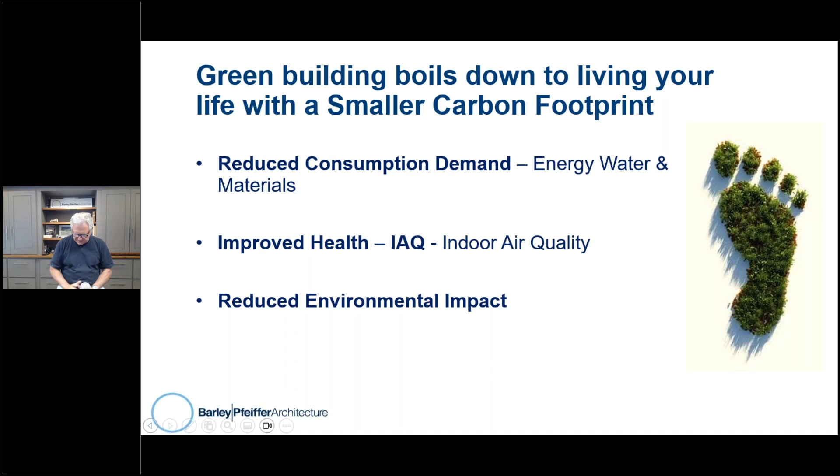So to me, green building really boils down to a smaller carbon footprint. How do we encourage folks to live with a smaller carbon footprint? We reduce the consumption of things: water, energy, materials. We look to improve your indoor air quality so you have better health. And we reduce environmental impact by choosing smartly where we're going to build or remodel. So those three things form the foundation of the green building movement.

As it moved forward, I realized we have to keep it simple, because if we get into complicated things, you've got to understand complicated things, gizmos, etc., they break. Solar systems, for example, will not last forever. My inverter on my home system went out 2 years after the warranty was up. So my payback went from being 13 years to more like 21 years. Keep in mind that it would have been better just to save energy in the first place by design than to try to create energy.

So we want to first and foremost rely on thoughtful climate-sensitive programming. What decisions can we help our clients make that will make it so they can live better while living with a smaller carbon footprint? They're not really complicated, folks. They're some very basic things. And then I also want to advocate the idea of building the architect and builder team early on. When we build the team early on, there's a great synthesis that can occur that will make building effective and less expensive.

I think the green building movement is failing a bit in its mission, and I know that's a strong statement, but I think a lot of it goes to the fact that while LEED and energy efficiency programs like Passive House USA, LEED, and others are wonderful, and they've really brought this whole concept of living with a smaller carbon footprint to the public's consciousness, you almost get too complicated in your approach.

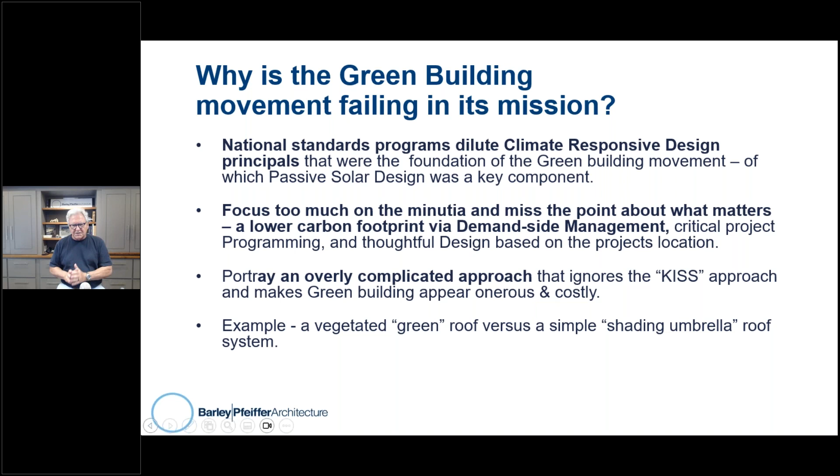Because we have to be careful. A green roof in Austin, Texas would be a very tough thing to keep alive during these past 4 months without putting a lot of water on the roof, and water is becoming more and more dear around the country. So I'm not saying vegetated roofs are bad. I'm saying just make sure the strategies you choose make sense for your location and your climate.

Another point is that most of you listening to us today are in a very, very important position when it comes to society. Our clients put trust in us to guide them through the most expensive endeavor of their lives. So it's incumbent upon you to understand things objectively and give them objective guidance. We sometimes don't realize how important that is, but think about it. The most expensive endeavor of most people's lives is building their home. The advice you give them affects that.

And it starts off with this project programming, and then we get into the design decisions, then the building science decisions. But while building science is important, especially when it comes to the long-term costs of owning and maintaining a home, it's the decisions we're going to make early in the game that are going to affect things even more.

Here's a small but obvious example. Here's 2 homes in Austin, Texas. One is painted white, one is painted black. Look at the difference in the wall temperatures of those 2 homes at the very same time of the day. 101 degrees versus 131 degrees. So that decision to go with a dark color doubled the amount of insulation needed in those walls to keep the living quarters on the other side of those walls as comfortable.

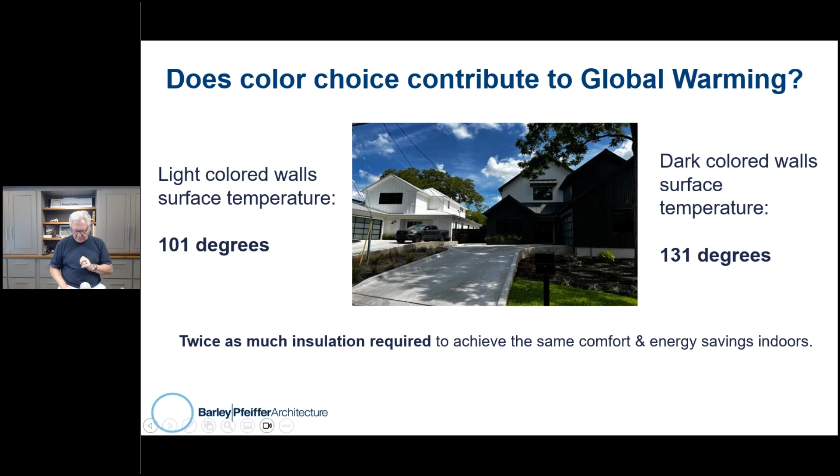So it doesn't only affect those things that I just mentioned, but it also affects this thing called the suburban or the urban heat island effect. If you have a neighborhood of dark houses and dark roofs, it's going to be at least 3 and as much as 5 degrees warmer than a neighborhood in an area like ours with light colored roofs and light colored exteriors.

When I went to graduate school, I was enamored with this professor who convinced me to come here. I was looking at some wonderful schools like MIT and Berkeley, but the University of Texas had a physicist on the School of Architecture staff who was the first that I knew of to develop an energy analysis program to help builders and architects understand how their buildings are really using energy.

And he taught us to use computer-based analysis and metrics so that we could do this analysis, but more importantly, so that we could develop an intuitive understanding of how to design for the environment. He said, think about what enhances your personal comfort, then design the building with that in mind.

Here's a good example. In Austin, as I said earlier in the talk, we air condition 50 to 75% of the days of the year. So is insulation that's going to keep you warm going to be of great benefit? Probably not.

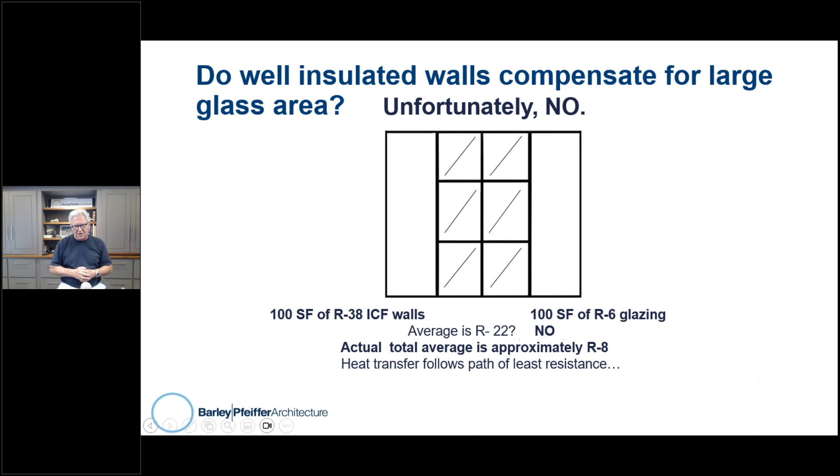So there is an example of, while it may be popular to do floor-to-ceiling glass and a lot of it, you have to be careful. Here's another example. That bottom third or a quarter of the glass that's down near the floor that you're not looking out of is contributing to 75% of the solar radiation gain in the building.

We've done energy analysis of flat roofed houses with floor-to-ceiling glass. Sadly, there is no way you can make them perform any better than maybe a C+ compared to a house with broad overhangs and a gabled roof where you had an attic. So these are neat design decisions, but be aware they're costing us in society money and the carbon footprint.

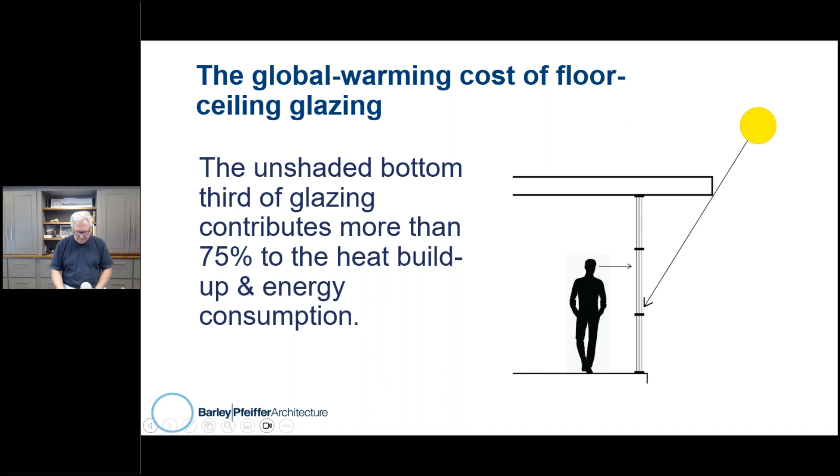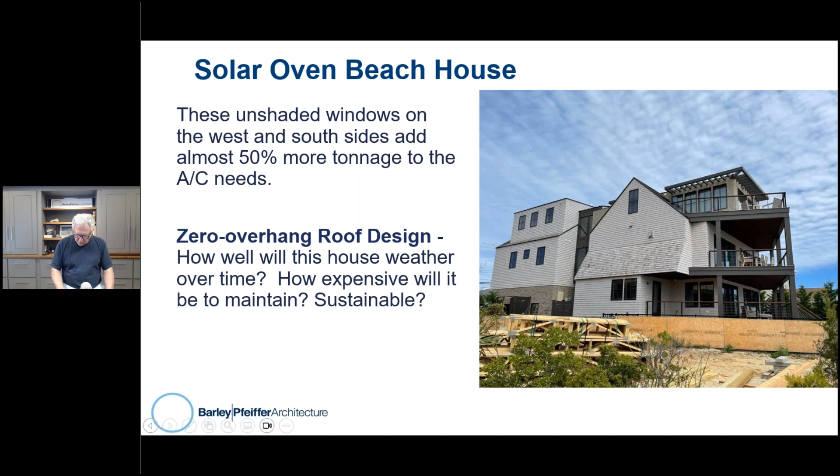So, as my mother used to say, if everyone else was jumping off the Empire State Building, would that mean it would be okay for you to do it? And I'm going to translate that to say, just because a lot of our colleagues are doing homes that don't respond to the elements doesn't mean you should be doing it. You can do good looking stuff that responds to the elements and to the climate.

The roof is another example of that. A living roof is wonderful for reducing the amount of radiation that penetrates the roof and heats up the home.

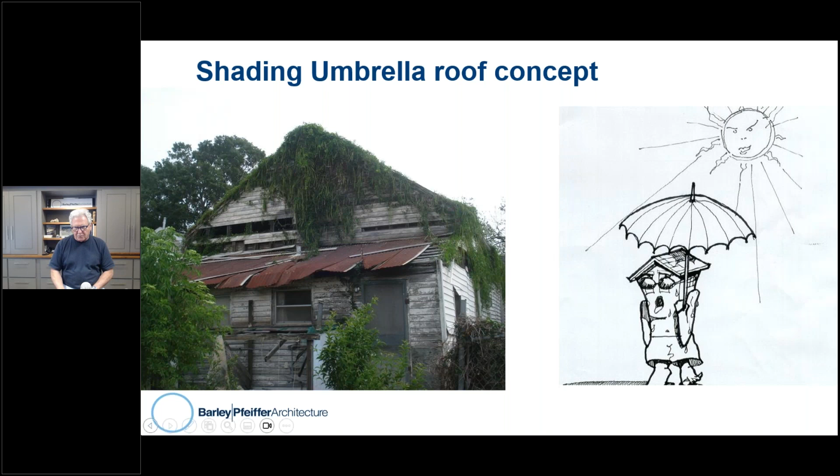But maybe we can do it more efficiently, and this is where we develop the idea of a shading umbrella roof. This is not an example of what you want to do. Here you've got a dark colored roof that's applied directly to the roof deck. So that roofing material, this metal roofing material, gets very hot and very efficiently transmits its heat to the roof decking and the rafters and the home below.

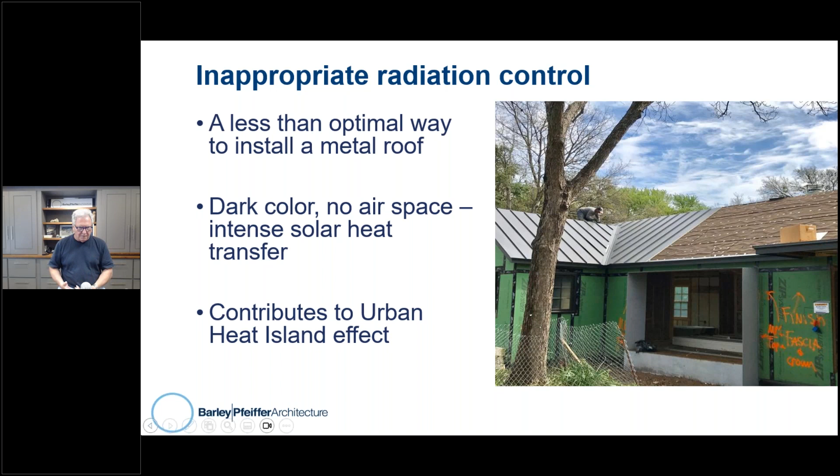So let me pull some of these things together for a project we submitted recently for some design awards. We call it Skyview Independent because it's a beautiful home that was designed for a family to pass on to their kids and their grandkids as a family gathering place. It's a relatively good size home, but its carbon footprint is wonderfully small. All of its electricity is generated on site by the solar system, but we were able to do that with a modest solar system because we shaded the windows and had this shading umbrella roof and did the design to respond so well to the climate. Also, all of its water needs are handled with the rainwater collection system.

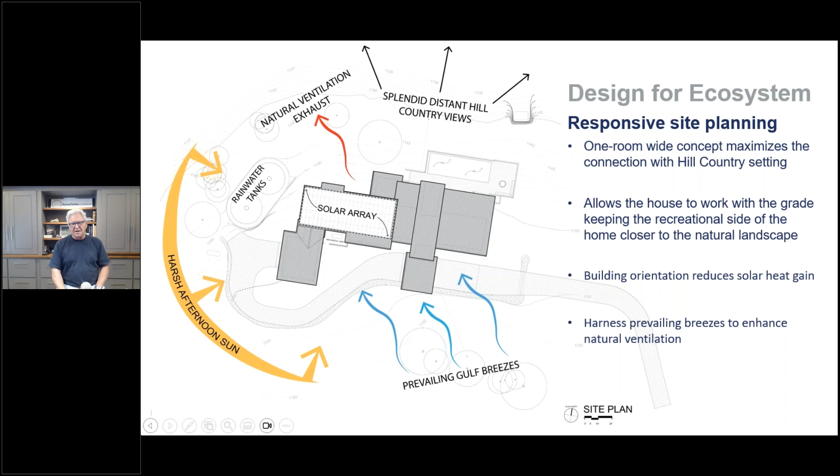So first and foremost, we want to make sure the building's oriented not only to the wonderful views, but to take advantage of the prevailing breezes and to shun itself from the hot afternoon sun. You'll notice on the left-hand side, that's a garage building that's taking most of the solar heat and some utility rooms on the left. We don't have the main living areas facing into the afternoon sun. The house is only about one room deep, so it could really take advantage of natural daylighting, shaded daylighting, reflected daylighting, no direct solar heat gain anywhere in this house.

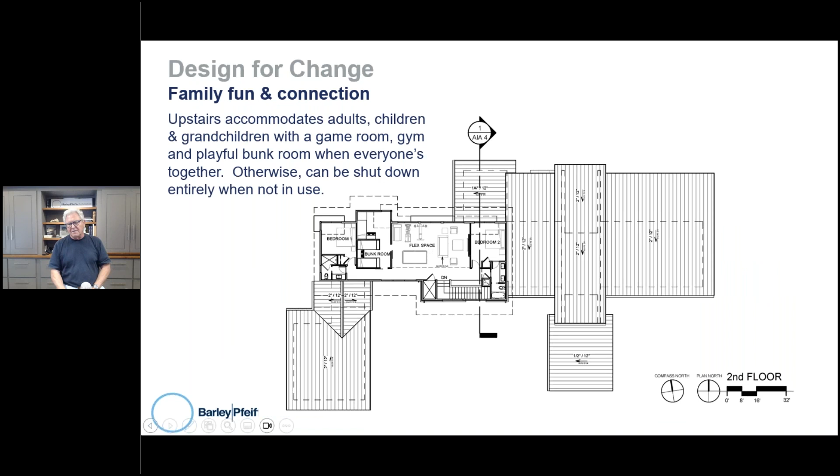On the second floor, which is where the grandkids and the kids would be, it's a whole separate air conditioning zone that can be just turned off in the summertime if the kids aren't there, or turned off in the wintertime when they're not there. You don't have to turn up the thermostat, just turn it off. The house won't melt and the house won't freeze. But the point is, we really separated the visitors areas from the main living area of mom and dad, so that we weren't air conditioning and heating a part of the house only for, what, 5% visits a year.

When we went out to the site, we experienced where the breezes were coming from. We did some studies ahead of time. A simple way of finding out where your prevailing breezes are coming from is look at the nearest airstrip. Whichever way the runway is facing tells you where the prevailing winds and prevailing breezes are coming from. So take advantage of that when you're designing. Look at the vegetation, get to know the soil, because the vegetation and the soil will be important for you to take into consideration when coming up with a design. But you have to go to the site, you have to learn it. The site will tell you all sorts of things.

So this design is luxurious, it promotes healthier living, it's resilient in the aftermath of natural disasters for one big reason in our area. You can live in this house without air conditioning. It's designed to be comfortable without air conditioning. Imagine how many homes you cannot say that for nowadays. But because the windows are shaded, it's not collecting a lot of heat. Same with the roof. And yet the windows are designed to enhance natural ventilation.

The house will get up to about 82 degrees on a 102 degree day without air conditioning. That's survivable. That's something you could live in after a hurricane shuts down the local power plants for a few weeks. So resilience takes many different approaches. A resilience approach here is to keep the house cool and comfortable after a hurricane.

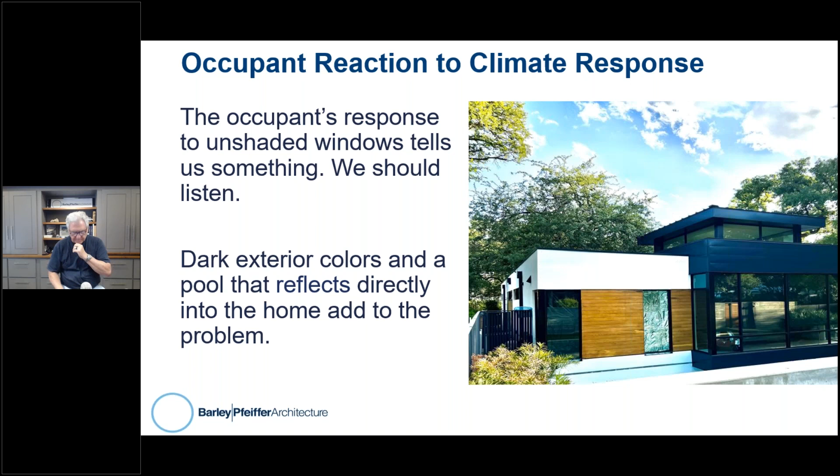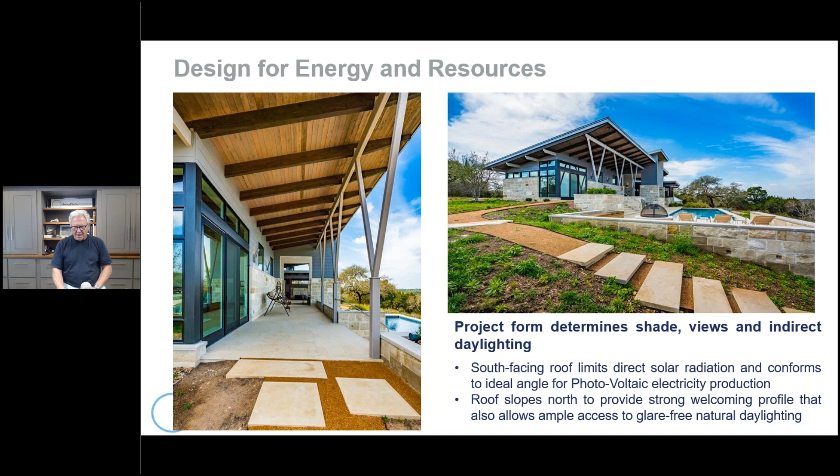And what makes it nice on top of all of that is because we had such a large roof area facing south, it was a great place to mount an ample amount of solar panels. But the point is, by design, the home is making itself more comfortable and less consumptive of energy. We use that large roof also to collect all the water it needs for the rainwater collection system.

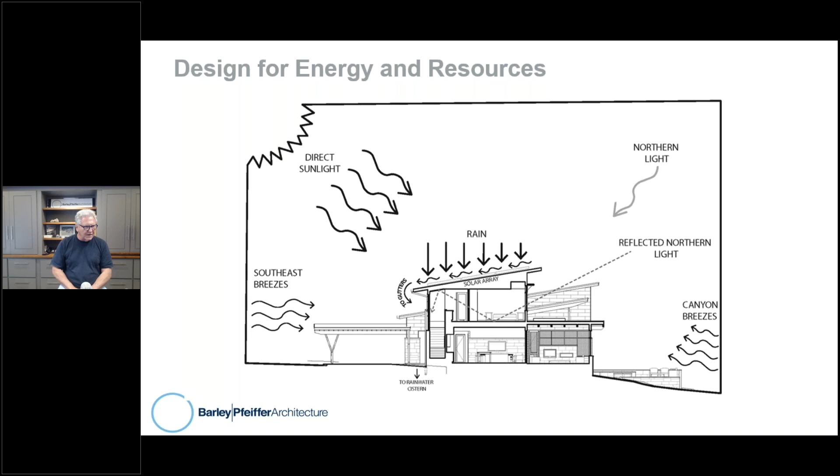But primarily, the lighting that comes into the house is reflected light, reflected northern and southern light. Really avoid direct solar heat gain and direct light coming in from the sun. Even if you're living in Indiana in the summertime, it's going to be glare and problematic. Reflected light is your friend. I'm not going to bother trying to go through all of the strategies we used here.

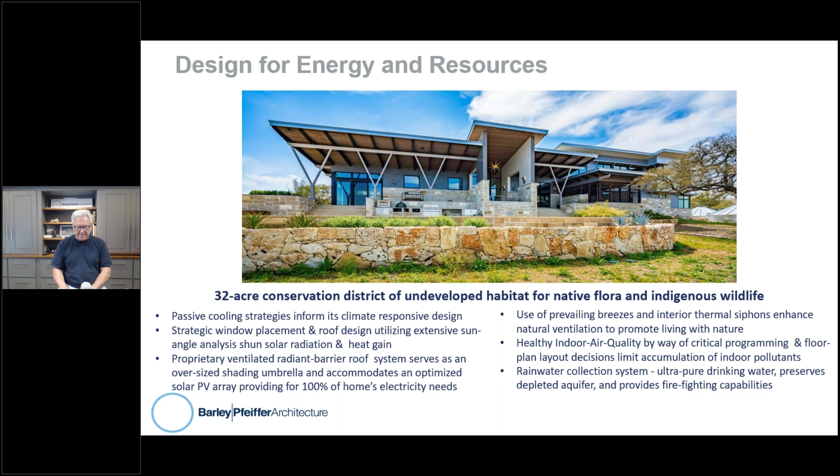Let's just move on, but I wanted to show you a view of the north face or the back of this house. And here we have the west face in the lower left-hand corner. Notice how few windows are facing west, and you'll notice the awnings directly above the two bigger ones. We let things like the garage and the laundry room and the back entry bear the brunt of the solar heat.

By the way, you'll also notice we use light colored building materials. It's a darker colored siding than it really appears in this photograph because it's in the shade. It's actually a light gray siding and very light colored stone. Because we're in an air conditioning dominated climate, dark red brick or dark stone would not be appropriate here. So there's an example of another design decision that will make this house more resilient and more comfortable.

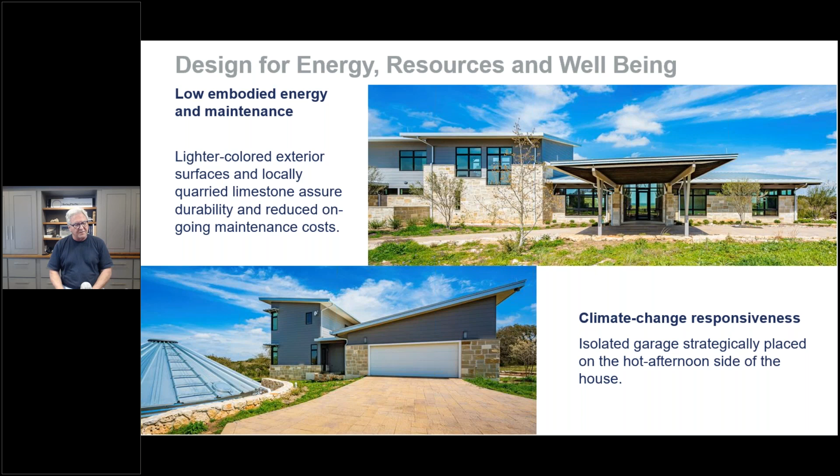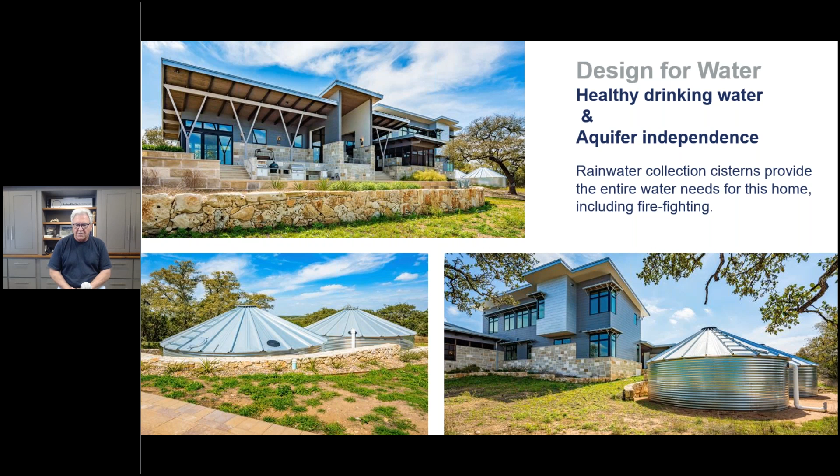And then you see the two cisterns, one of them on the left there; each one of them is 25,000 gallons, and that provides all the water we need to run this house. Plus, it provides a firefighting vessel, which greatly reduced the homeowner's insurance premiums because they have the stored water to fight a fire, even though they're at a very remote location. But notice the awnings above the windows in that lower right-hand slide. We do sun angle calculations to tell us how much horizontal shading we need to protect those vertical windows.

We're not trying to light the work area with recessed cans 10 feet up in the air. Lighting falls off as a square of its distance from the task. I know that's a nerdy statement, but follow me here. A light fixture that is 1 foot above the countertop will put out a certain amount of light that will reflect up to your eyes.

If you move that light fixture 3 feet above the countertop, it will need to put out 9 times this many lumens of light for you to get the same beneficial effect. That's what I mean, that lighting falls off as a square of its distance to the task. So bring the lighting down close to the task. Sure, you want to use LED lighting and energy efficient lighting, but the placement of the lighting and the reflective surfaces are more important.

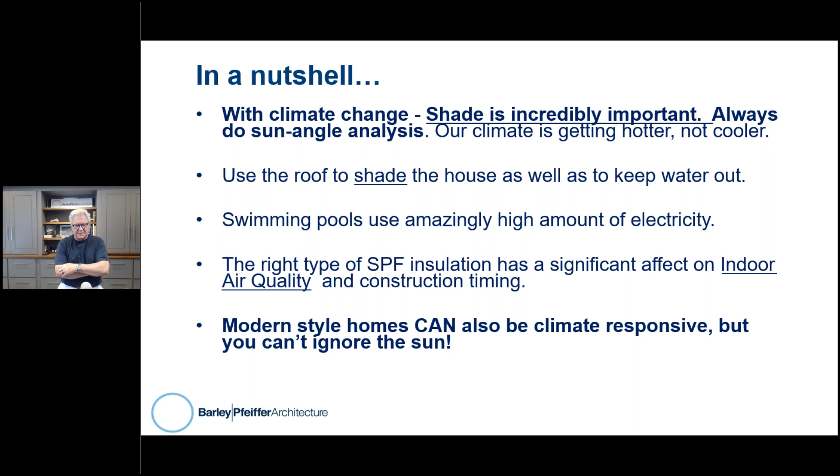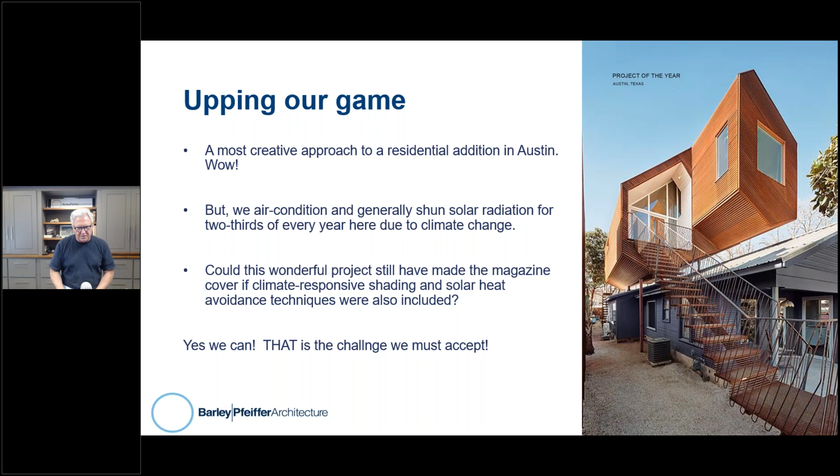But remember, we air condition here and shun radiation for about 2/3 of the year as a function of climate change. So could this project still have made the magazine cover if those windows were shaded and if the exterior color was thought about from the perspective that we talked about in this talk? Now, my answer to that is yes, it still could have won design awards and be climate responsive. And that's the challenge we have to accept. So if you get nothing else out of this talk today, please make sure that's the point. You can do fantastic designs and be climate responsive.

Last but not least, I love this statement by Kurt Vonnegut: we will go down in history as the first society that wouldn't save itself because it wasn't cost effective.

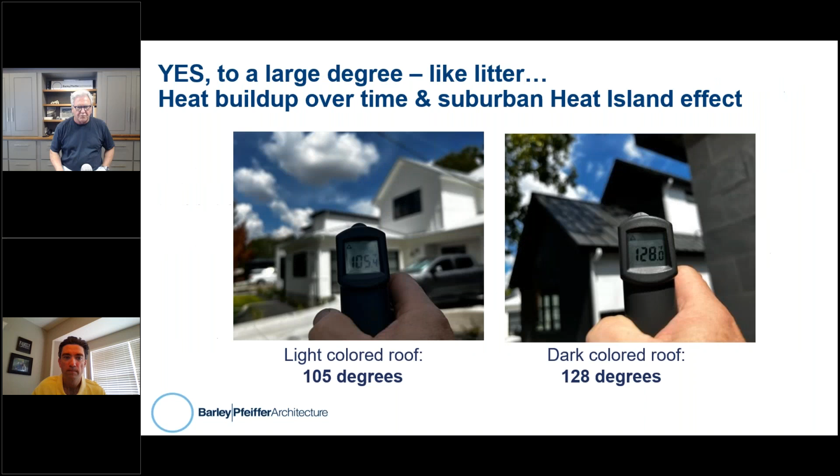But here's something to now add to that. How long will it stay bright and white? A lot of these strategies we've talked about, where we think about the albedo effect of the roof color, do diminish over time, which is why I really want to point out the benefit of that shading umbrella roof we designed, because the real benefit is not so much that exterior color. I don't know if you can see this. I just went back to the slide.

It's the color and the surface underneath this roof that's elevated above the roof deck that is acting as a true radiant barrier, and that will never get affected by the elements. So that was the lesson I learned over the years: while a light colored roof is beneficial, a radiant barrier that's well protected from the elements is going to be the long-term play.

Okay. Switching gears a little bit here, Peter, Deborah wanted to know, what energy modeling software do you like? Well, that's a good question. My former employer took a lot of what we were developing in graduate school back in the early 1980s and developed a program called AutoMac.

His name is Mac Holder, L.M. Holder III in Austin, Texas. He is the one who actually owns the license to the program. He's a small-time provider. He's an architect, but it is by far the most accurate and insightful energy modeling program of any of them out there. So I would contact L.M. Holder III in Austin, Texas, and ask about buying his computer energy analysis program.